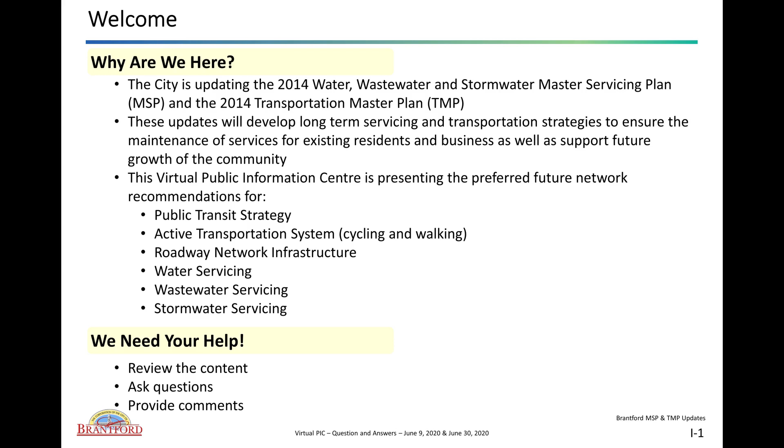The goal of the MSP is to develop a long-term servicing strategy for the City's water, wastewater, and stormwater infrastructure. The servicing strategies have been developed to ensure the maintenance of services for existing users and to support future growth. The objective of this presentation is to answer questions submitted by the public prior to June 23rd in response to the virtual PIC originally posted on June 9th, 2020.

This presentation is the second of many steps of the virtual PIC process. Questions asked after June 23rd but before July 21st will be answered through a frequently asked questions document. The City would like to thank all respondents for their questions and comments as part of the virtual PIC process.

We would like to acknowledge that the City received several similar detailed questions for a multitude of locations throughout the City. For this question and answer video, similar themed questions have been combined and answered. For site-specific questions not directly answered in this question and answer video, the City may reply directly to the respondents.

How are the capacities and existing flows and demands of the water, wastewater, and stormwater system determined? The City collects and maintains an extensive amount of data relating to the existing condition and performance of its sewers, water mains, and facilities. This information ranges from detailed inventory and construction records, sewer and facility inspection records, maintenance records, water billing records, in-system flow readings, rainwater gauges, and system performance testing, among others.

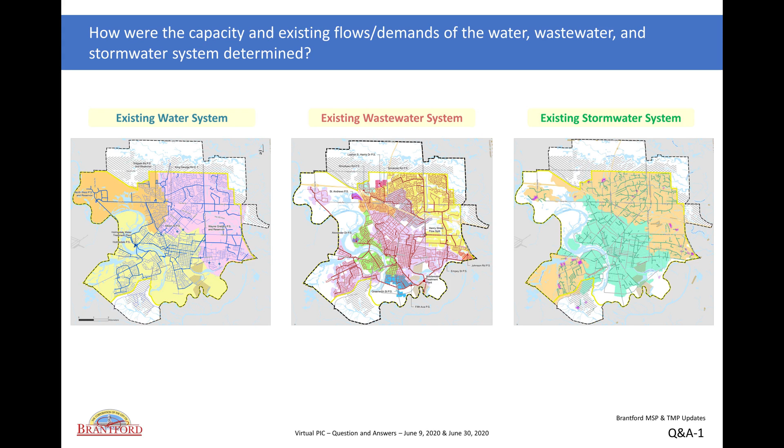How are the impacts of growth and upgrade needs determined and evaluated, including evaluation of downstream impacts? The City's existing water, wastewater, and stormwater system hydraulic models and capacity tracking and allocation tools were used to assess the potential impacts of growth on the existing system and to identify the potential upgrade needs. For example, to assess the impacts of growth on the wastewater system, a review of the new service areas was completed to identify the potential servicing area and likely connection to the existing wastewater system.

Once completed, the estimated growth and new service areas were converted to potential flows utilizing the City's design criteria as outlined in the City's linear design and construction manual. The resulting flow projections were added at the appropriate locations within the hydraulic model and allocation tool to determine the potential impacts on the existing wastewater system and to identify any downstream restrictions. If local or downstream capacity restrictions were identified, then appropriate servicing concepts and alternatives were developed and evaluated in accordance with the process described on slide I-5.

The servicing review of growth areas within the proposed urban boundary expansion areas was completed based on the existing ground elevations, identified natural heritage system, and existing city infrastructure capacities. Allowances for local grading in order to simplify servicing and minimize the total number of pump stations and stormwater management ponds were considered.

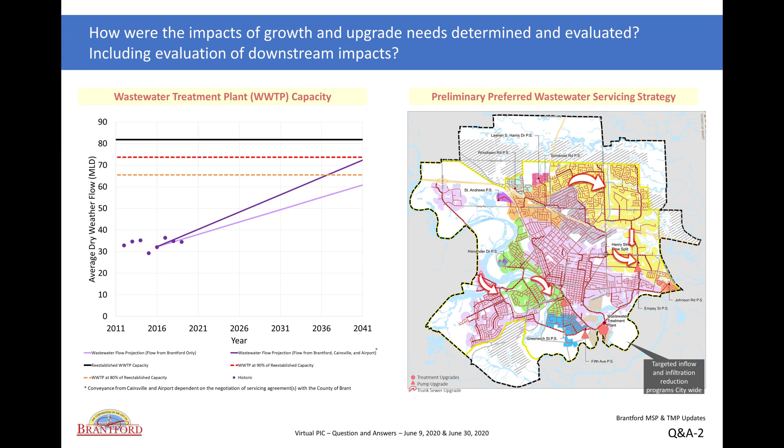Further, an evaluation of servicing strategies was completed in the context of providing the best overall citywide approach, including allowances for servicing of all lands within the city's municipal boundary.

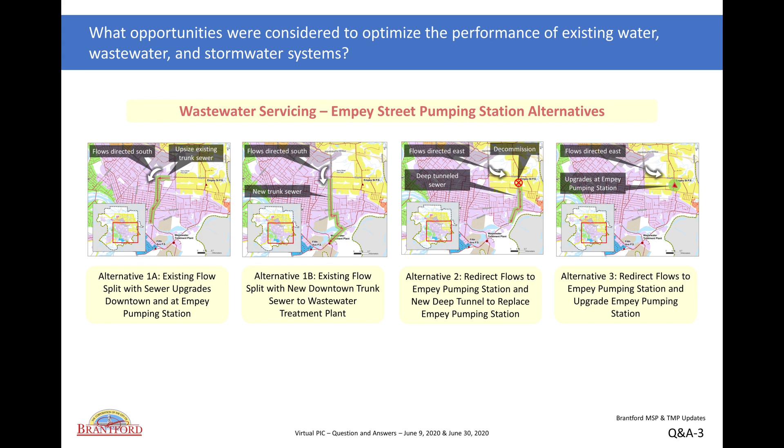What opportunities were considered to optimize the performance of the existing water, wastewater, and stormwater systems? One of the Master Servicing Plan objectives is to maximize the capacity of the existing systems and facilities. Opportunities that were explored included sewer diversions to minimize upgrade needs, optimization of facility operations, system and facility rehabilitation, and wet weather flow reduction.

When will the recommended upgrades be triggered or implemented? How will the city track the available capacity of the existing water, wastewater, and stormwater infrastructure? The final Master Servicing Plan capital program will identify upgrade triggers and preliminary timing based on current planning projections.

For existing infrastructure, the city utilizes its existing allocation and capacity tracking tool to monitor available capacity versus committed and requested growth allocations. Once the identified capacity triggers for infrastructure have been achieved, the city will initiate appropriate planning, design, and construction processes which are subject to available approvals, timing, and resources.

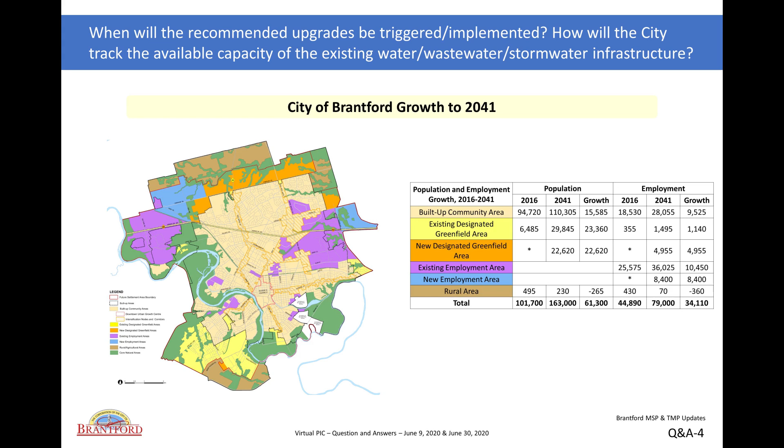How were existing forecasted capital projects considered in the Master Servicing Plan? As part of the Master Servicing Plan, the city's existing capital projects from the 2014 Master Servicing Plan and the 10-year capital forecast were reviewed.

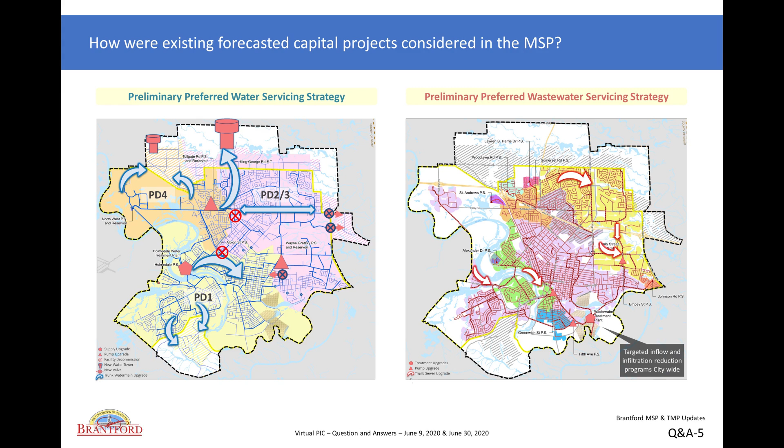For planned rehabilitation projects, where an increase in capacity was not identified, the Master Servicing Plan reviewed to confirm if the proposed sizing remained sufficient or if there was an opportunity to upgrade by deferring upgrade needs elsewhere in the system. For planned upgrade projects, the Master Servicing Plan reviewed to confirm if the proposed project is still required, and if it is needed, to confirm the recommended upgrade capacity.

For the identified environmental assessment studies, what options will be considered? For projects requiring environmental assessment studies, the Master Servicing Plan will identify the infrastructure's general capacity and servicing requirements. The environmental assessment will consider all viable alternatives that meet those identified capacity and servicing requirements.

For example, the Oak Park Trunk Sewer and Water Main Extension environmental assessment will consider all viable alternatives to connect the existing trunk infrastructure south of Highway 403 to the expansion lands north of Powerline. This includes full and partial alignments along Oak Park Road and Powerline and alignments through the future development areas.

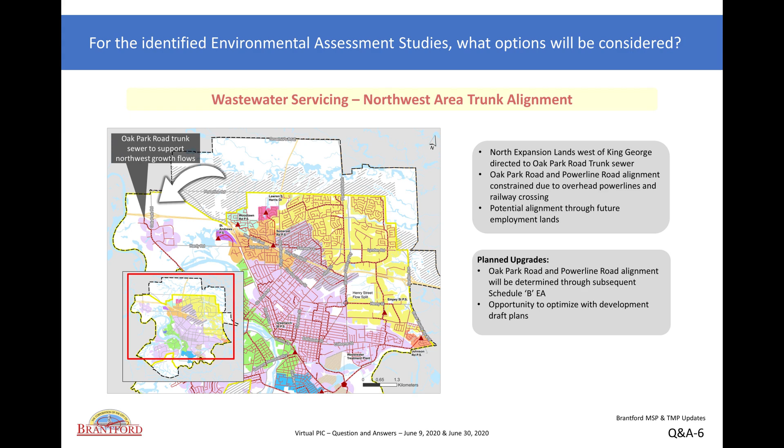Why are there more or different needs as compared to the 2014 Master Servicing Plan? The 2014 Master Servicing Plan outlined the city's infrastructure needs to address growth to 2031 within the city's previous municipal boundary. This Master Servicing Plan update addresses growth to 2041, revised growth projections, increased intensification, and servicing of the boundary expansion lands.

Since the completion of the 2014 Master Servicing Plan, the city has: 1. Reviewed and updated the city's design criteria and system performance objectives to better service existing and future users and to better address issues related to system resiliency, risk, and climate change. 2. Collected additional information updating the city's understanding of the existing water, wastewater, and stormwater system capacities and performance. And 3. Completed several system upgrades and modifications recommended in the 2014 Master Servicing Plan.

As a result of the updated growth horizon, updated design criteria, and updated system understanding, the Master Servicing Plan update has identified additional needs. For example, in Pressure District 4, the 2014 Master Servicing Plan projected limited employment growth. As such, no water storage needs were triggered.

Under the revised 2041 growth scenario, there is a substantial increase in Pressure District 4's residential and employment growth. These additional growth needs, combined with the city's revised storage requirements and the 2018 expansion of Pressure District 4's service area, have triggered the need for additional storage within Pressure District 4.

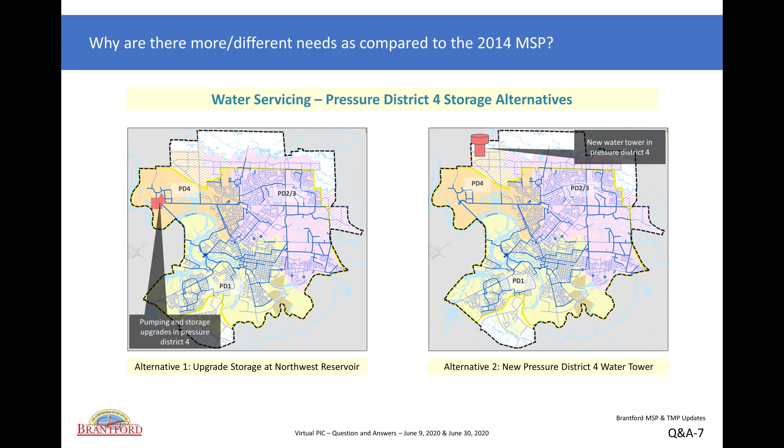How will the future service areas or catchments be determined? The Master Servicing Plan has identified provisional service areas and catchments. Service areas and catchments within the existing system are expected to remain generally unchanged. Service areas and catchments within the proposed urban boundary expansion lands were identified based on existing ground elevations, identified natural heritage systems, and existing city infrastructure capacities.

Allowances for limited local grading in order to simplify servicing and minimize the total number of pump stations and stormwater management ponds was considered. Further, an evaluation of servicing strategies was completed in the context of providing the best overall city-wide approach, including allowances for the servicing of all lands within the city's municipal boundary. The evaluation of servicing concepts considered technical, environmental, social cultural, and life cycle cost factors.

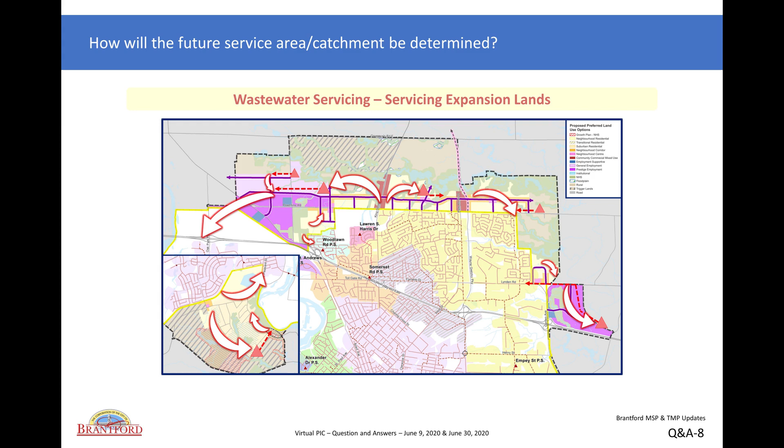The service areas and catchments are expected to be further reviewed and finalized as part of the block planning process for the expansion lands, or as part of the draft plan site plan process for developments within the city's existing urban boundary. Changes to the preliminary service areas and catchments will be reviewed and considered based on their merits, provided they do not restrict the serviceability of adjacent lands and there is sufficient system capacity.

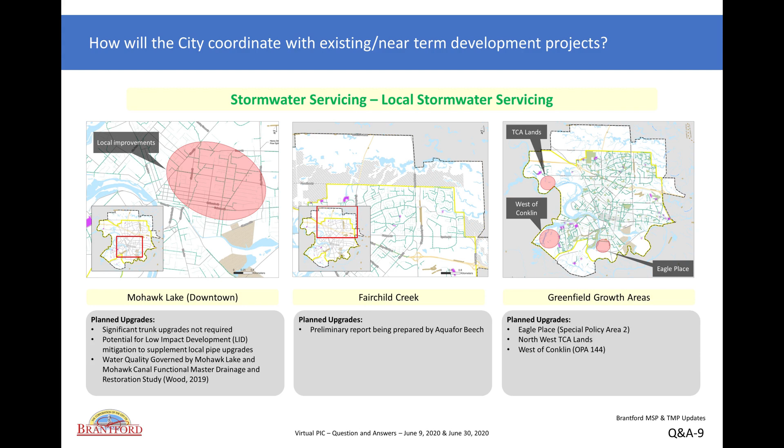How will the city coordinate with existing near-term development projects? For recommended water and wastewater projects, the city will coordinate with existing and near-term projects as part of the standard draft plan and site plan process. For the identified stormwater needs, the city plans to initiate further area-specific studies before proceeding with the implementation of any master servicing plan recommendations. Coordination and consultation will occur as part of these subsequent studies.

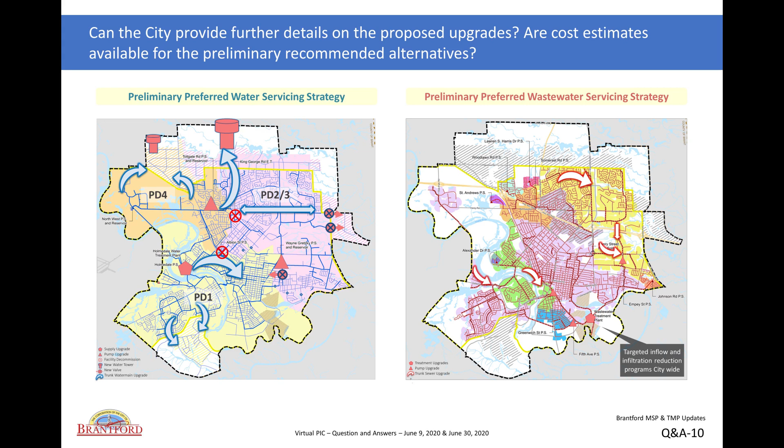Can the city provide further details on the proposed upgrades? Are cost estimates available for the preliminary recommended alternatives? Further project details, including cost estimates, will be provided in the final Master Servicing Plan Capital Program, which will be available for public review and comment as part of the final Master Servicing Plan document's 30-day review period.

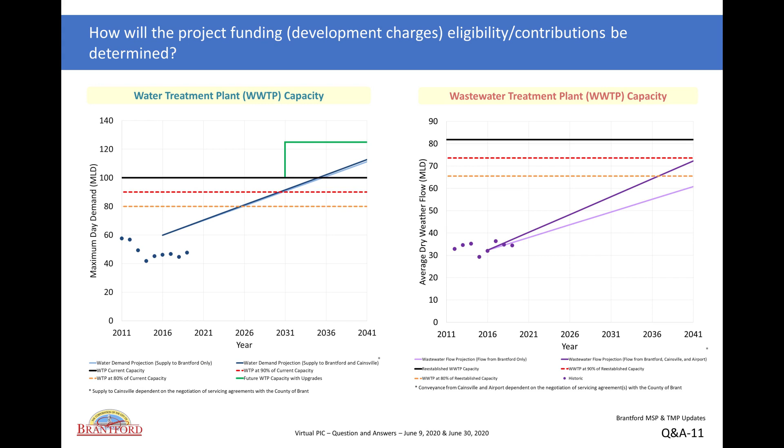How will the project funding, or development charges, eligibility contributions be determined? The final Master Servicing Plan Capital Program will provide estimated project costs as well as identifying project objectives and triggers. Following the completion of the Master Servicing Plan and Transportation Master Plan, the city will be undertaking a development charge background study, a water and wastewater rate study, and a financial plan update. These studies will be used to update the city's existing development charges and water and wastewater rates.

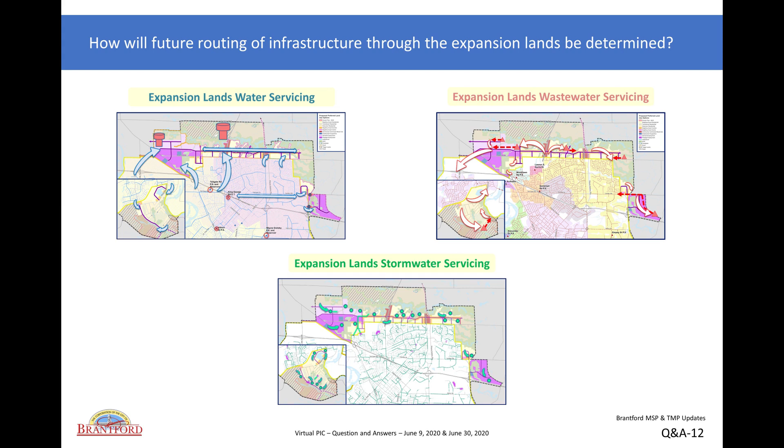How will future routing of infrastructure through the expansion lands be determined? The Master Servicing Plan has identified conceptual water, wastewater, and stormwater servicing for the expansion lands, including trunk infrastructure requirements. The Master Servicing Plan Capital Program includes provisional routing of trunk infrastructure along the proposed arterial and collector roads. Final routing of trunk infrastructure will be identified as part of the block planning process.

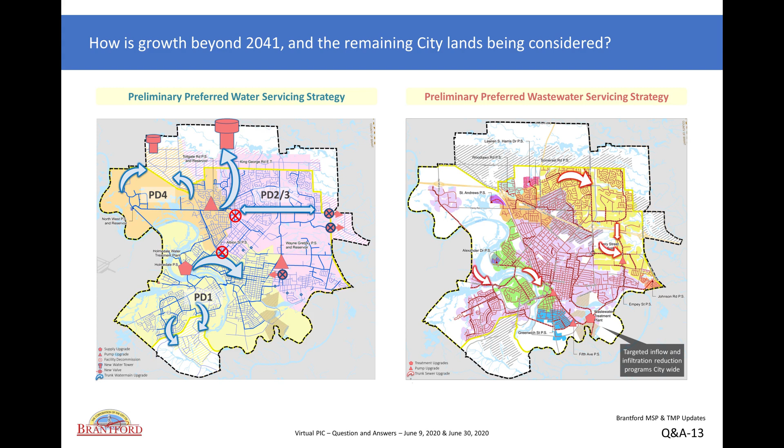How is growth beyond 2041 and the remaining city lands being considered? Only upgrades triggered by the 2041 growth scenario were included in the final preliminary preferred alternative presented in this PIC. However, for all new infrastructure and upgrade projects, the full build-out within the city's boundary was considered to ensure all identified infrastructure was sufficiently sized to support growth needs beyond 2041 and/or configured to allow phased expansion. Infrastructure requiring oversizing to meet growth beyond 2041 will be identified in the final Master Servicing Plan Capital Program.

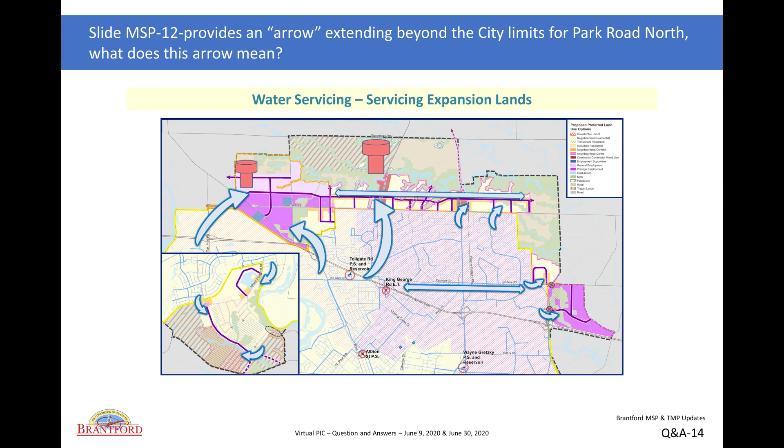Slide MSP 12 provides an arrow extending beyond the city limits for Park Road North. What does this arrow mean? The servicing arrows shown on all boards, including MSP 12, are intended to show the conceptual servicing of the area and not a representation of actual alignments. The arrow in light and dark purple within the North Expansion lands indicates potential direction for road connections inside and outside of the municipal boundary beyond the 2041 growth horizon. It is anticipated that all future municipal servicing to 2041, including the trunk water main extensions from the existing city system to the expansion lands, will be accommodated within the city's municipal boundary.

How will the expansion lands be serviced? The expansion lands water servicing is presented on slide MSP 12. Several separate water servicing components are recommended that collectively make up the overall preferred strategy. The main components to make up the preliminary preferred strategy are as follows. Increased treatment capacity at the Holmedale Water Treatment Plant. New water tower in Pressure District 2-3 to accommodate storage deficiencies in both Pressure District 2-3 and Pressure District 1. New water tower in Pressure District 4.

Upgrades at Wayne Gretzky and Tollgate Pump Station within Pressure District 2-3. Upgrade trunk water mains in Pressure District 1 to Tutela and the downtown. Upgrade water mains north to expansion lands along King George Road, and upgrade water mains east-west along Lynden Road and Fairview Drive in Pressure District 2-3.

Upgrade water mains north to expansion lands along Oak Park and Paris Road in Pressure District 4. Decommissioning of existing King George Tank and Albion Pump Station.

The expansion lands wastewater servicing is presented on slide MSP 25. In general, the expansion lands will integrate directly into the city's wastewater system at 5 key connection points. The Oak Park Trunk Sewer, that will service the majority of the lands west of King George. The Colbeck Trunk Sewer, which will service the remaining growth lands east of King George.

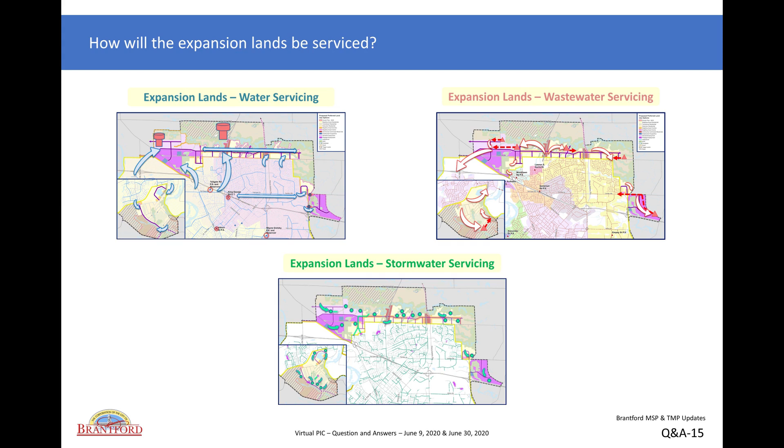Peak flow rates at outlets will be controlled to have post-development flow rates controlled to the pre-development peak flow rate. Major systems will be required to convey the 100-year design storm. Water quality will be of concern in the expansion lands. The MECP enhanced removal of 80% total suspended solids is the requirement for all new expansion land developments. Multiple subcatchments outlet to cold water creeks and will require thermal mitigation. Erosion control will also be required.

How are water and wastewater servicing going to cross the river to service development off of Hardy Road? The city's northwest, including the Oak Park and Hardy Road area, is serviced by an existing trunk water main and trunk sewer crossing the Grand River. The existing trunk water main and trunk sewer have sufficient capacity to support the expected growth within the respective service areas, including growth in the north expansion lands. As such, no new Grand River crossings are proposed.

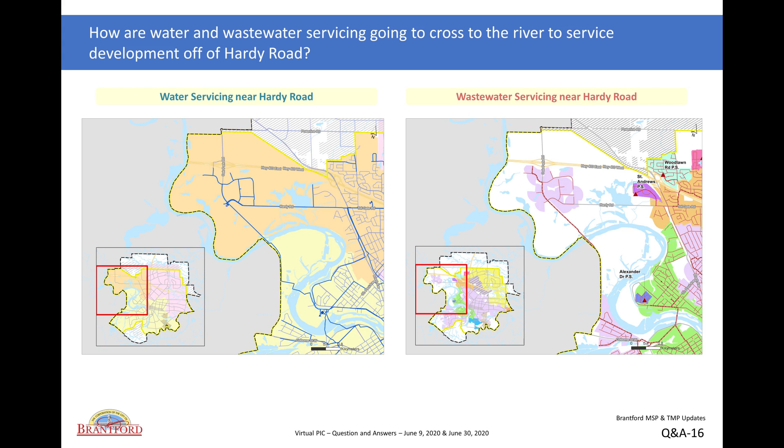Can you clarify the new Pressure District 2-3 water tower need and service area? Can you clarify the new Pressure District 4 water tower need and service area? When projecting 2041 system storage needs, storage deficits were identified for all pressure districts, including Pressure District 1, Pressure District 2-3, and Pressure District 4. The preliminary recommended strategy is as follows. Pressure District 4 deficit will be addressed by constructing a new water tower.

The new water tower is expected to have an operating level of approximately 300 to 304 meters and will address growth needs within the projected Pressure District 4 service area, which consists of the expansion lands west of Balmoral Drive. The Pressure District 2-3 deficit will be addressed by replacing the existing King George tank with a new elevated tower. The new elevated water tower is expected to have an operating level of approximately 282 to 285 meters, which is an increase from the existing King George tank to allow for improved system performance.

Further, to address post-2041 servicing needs for the remaining expansion lands, strategic oversizing of the tank is required. To optimize the performance of the system and to minimize total infrastructure costs, this surplus storage capacity in Pressure District 2-3 will be utilized to address the Pressure District 1 storage deficit.

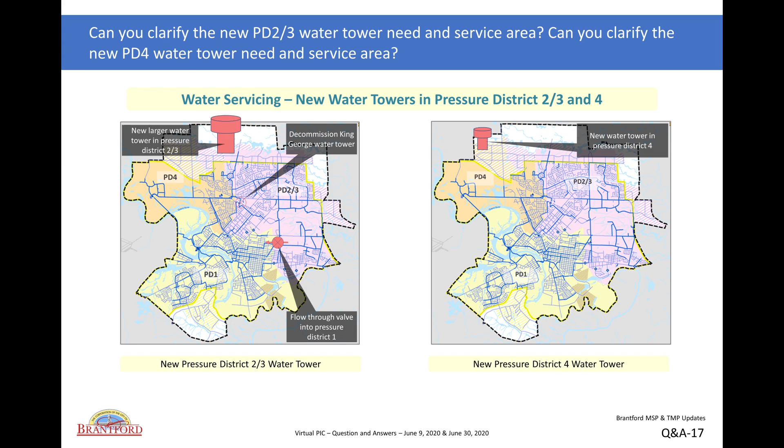Pressure District 1 storage deficit will be addressed by accessing the surplus storage capacity in Pressure District 2-3 via improved valving capacity at the existing Wayne Gretzky and Tollgate pump stations, until such time that the Pressure District 2-3 surplus can no longer address the Pressure District 1 needs, which is not expected to occur before 2041. Alternatives and associated projects to address Pressure District 1 storage needs after 2041 will be reviewed in future Master Servicing Plan updates. Environmental assessment studies will be required to determine the final elevated tower locations.

This concludes the virtual Public Information Center question and answer video for the Master Servicing Plan update.